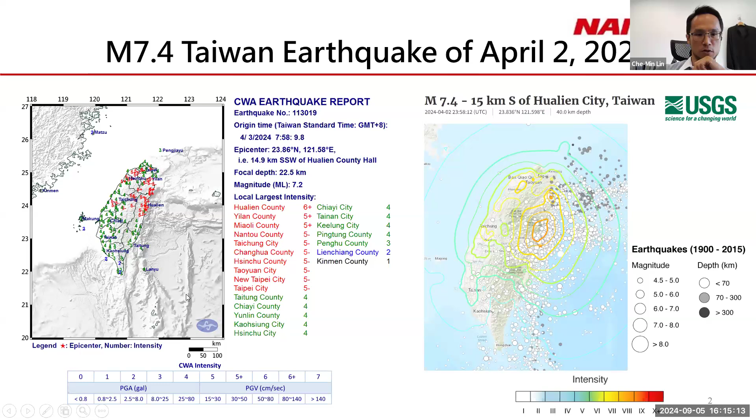Sorry, let me use this. Okay, it's better. At the northeast of the island, the Philippine Sea Plate is subducted to the north.

The longitudinal valley in eastern Taiwan is a suture zone, the boundary between the Eurasian plate and the Philippine Sea plate. Most of the Taiwan island at the west of the longitudinal valley is seen as the front of the Eurasia plate, and only the coastal range at the east of the longitudinal valley belongs to the Philippine Sea plate. Along the boundary between the longitudinal valley and the coastal range, there is a series of long faults called the longitudinal valley fault system.

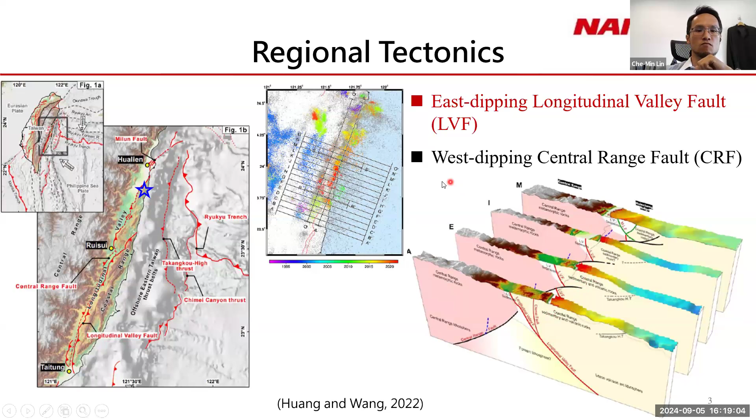Then an earthquake with a magnitude 7.3 happened in 1986. It caused not only damage in Hualien, but also building collapse in Taipei in northern Taiwan. After 2000, there were also several earthquakes that caused some damage in eastern Taiwan, mostly with magnitudes less than 7.

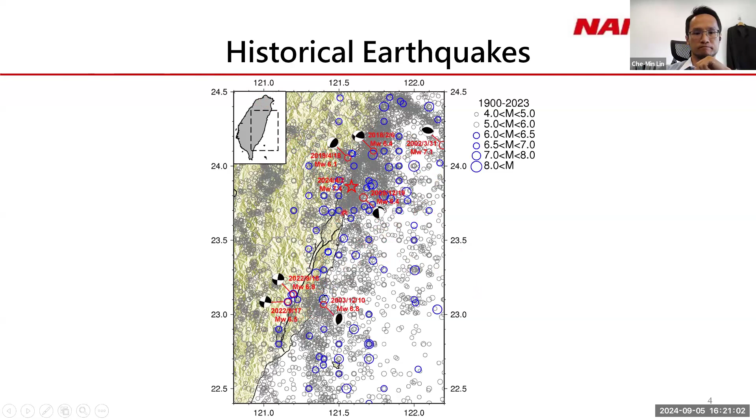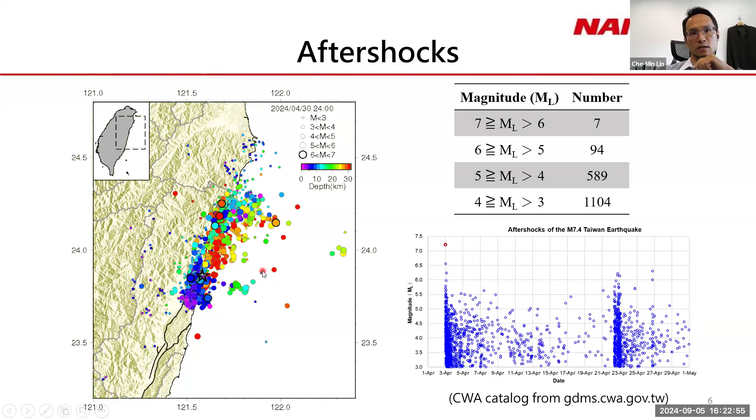Here you can see 3 large ones; they concentrate at the source of the main shock and were shallower than 10 kilometers deep. Furthermore, a minor third wave with 2 large earthquakes started on April 26th. Aftershocks have continued to occur until now, and actually this Monday, a magnitude 5.5 earthquake occurred around this region.

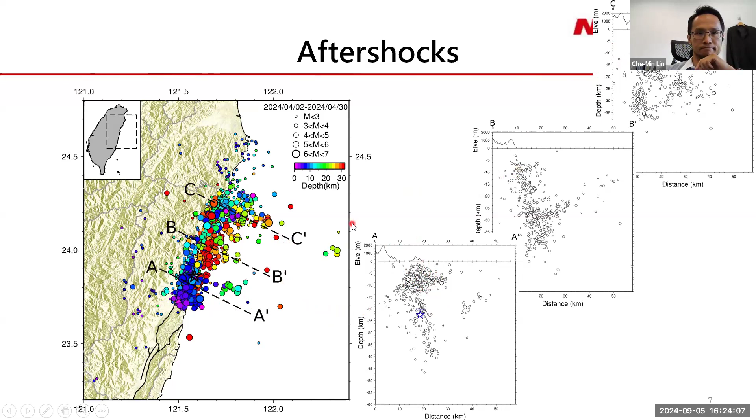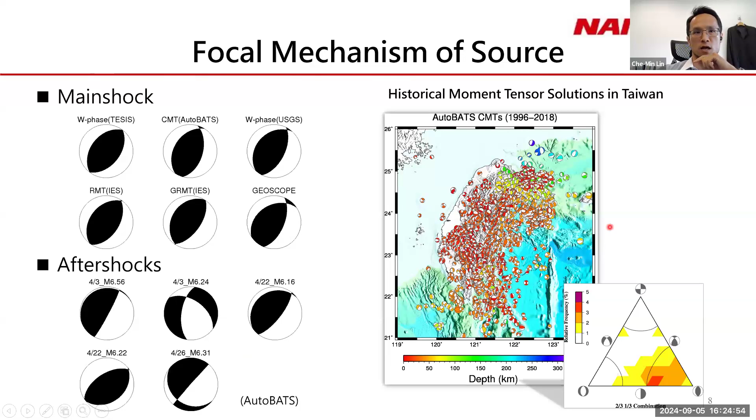The maximum slip of the fault plane happened near the hypocenter of the main shock, and the large slip moved to the shallow part in the north. Most of the seismic energy was released within 20 seconds, but the rupture duration was over 40 seconds.

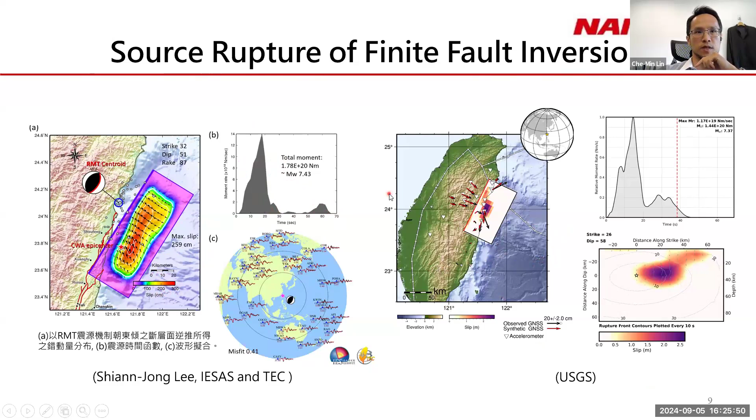The thrust fault rupture of this large earthquake along the northern longitudinal valley fault is also presented in the co-seismic displacements measured by GNSS stations around Taiwan. The stations on the hanging wall east of the longitudinal valley fault had the largest uplift of about 40 centimeters. Horizontally, the stations on the footwall west of the longitudinal valley fault moved to the southeast with the largest displacement of over 20 centimeters, pushing the eastern side displaced to the north and south.

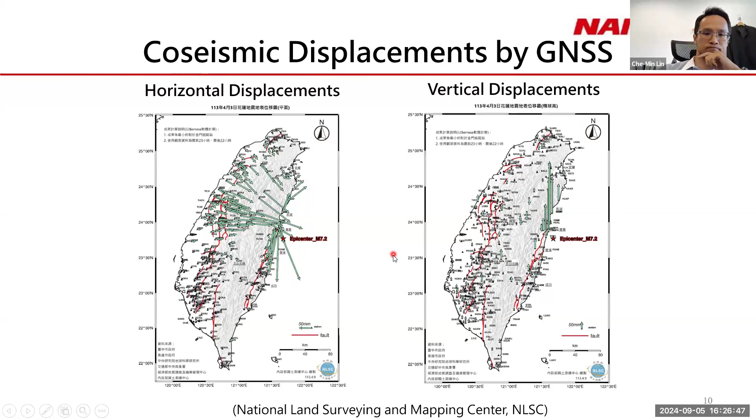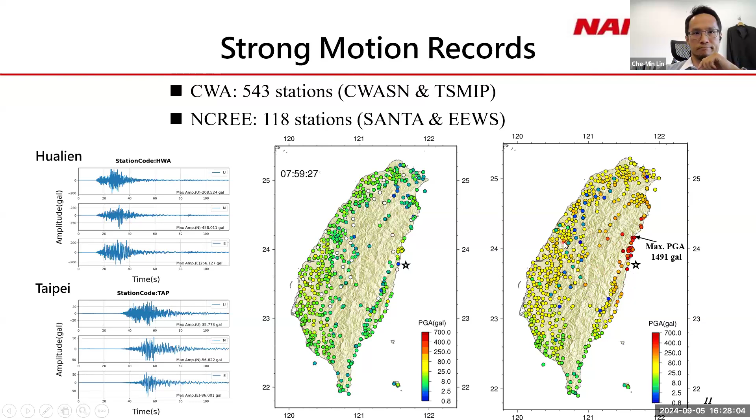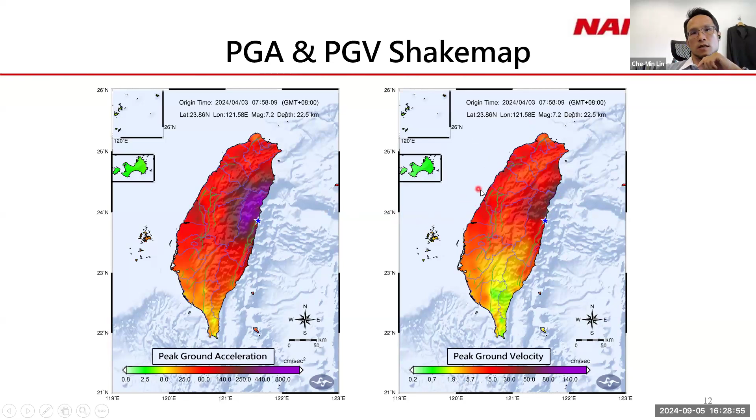The shake map of the peak ground acceleration shows that there were large areas that experienced ground motion of over 400 gal in eastern Taiwan, and about half of the island was shaken by ground motion of over 80 gal. For ground velocity, the maximum value observed near the epicenter was over 80 centimeters per second. The high peak ground velocity region extended from the epicenter to the north, and the peak ground velocity of the island's northern half is higher than that of the southern half.

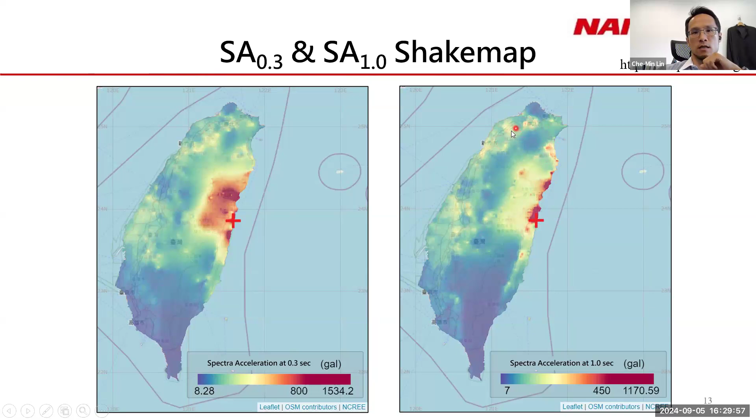Here we also show the shake maps of the spectral acceleration at 0.3 and 1 second. The distribution of the short period and long period spectral acceleration is similar to the PGA and PGV maps. The area with high short period spectral acceleration is large around the epicenter, but the area with high long period spectral acceleration is narrow and extends to the north along the coastal line. Besides, some local places show relatively high ground motion, especially in northern Taiwan, like the Yilan Plain, Taipei Basin, Taoyuan, Hsinchu, and Taichung area.

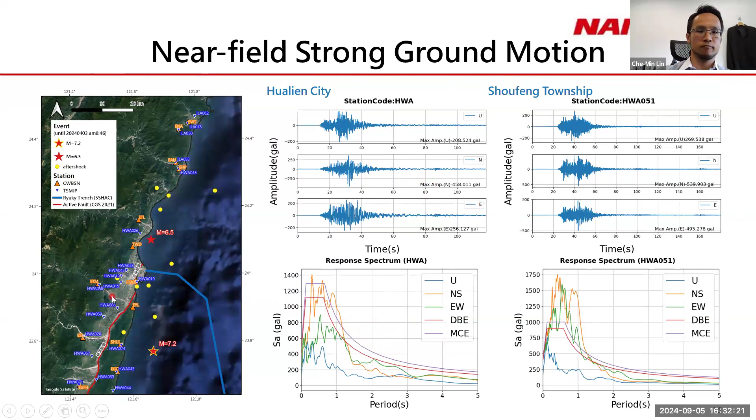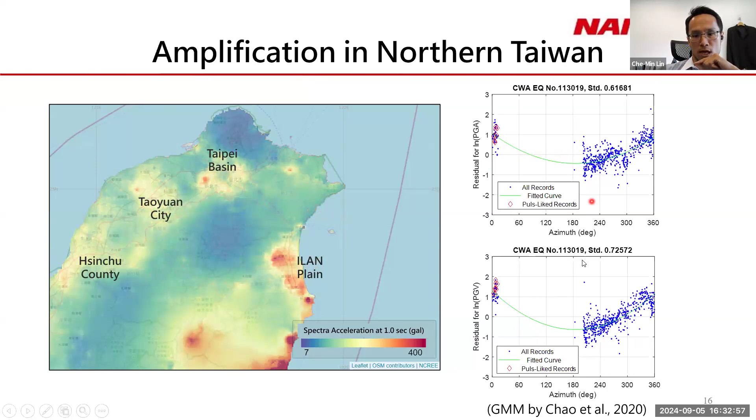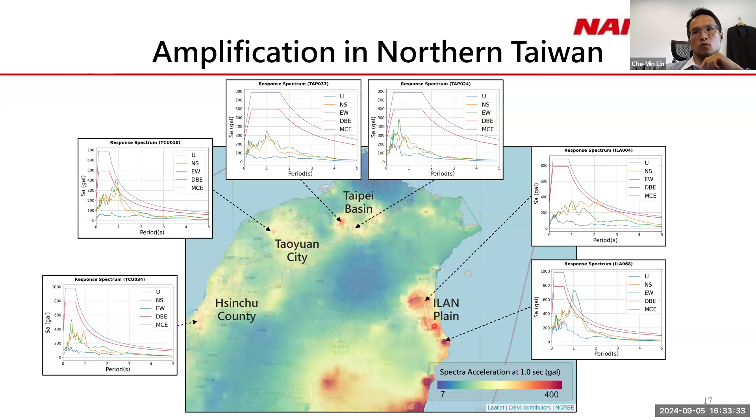Some of the response spectra are close to the design code, and some buildings in these regions were partially damaged during the Hualien earthquake. There are some reasons that caused the seismic amplifications in these regions. The first one is, of course, the site effect. The site amplifications in the Taipei Basin and Yilan Plain are significant and well known from historical earthquakes.

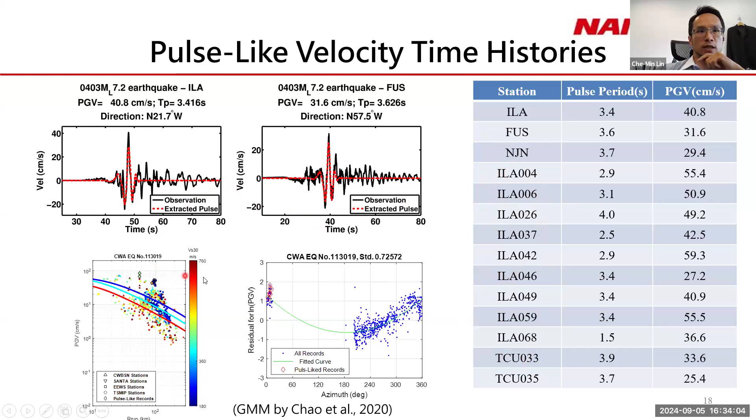The second reason is the long period velocity pulses. About a dozen stations observed pulse-like velocity waveforms during the Hualien earthquake. Most of them are located at the Yilan Plain. The velocity pulses result in the high peak ground velocity and long period spectral acceleration in Yilan Plain.

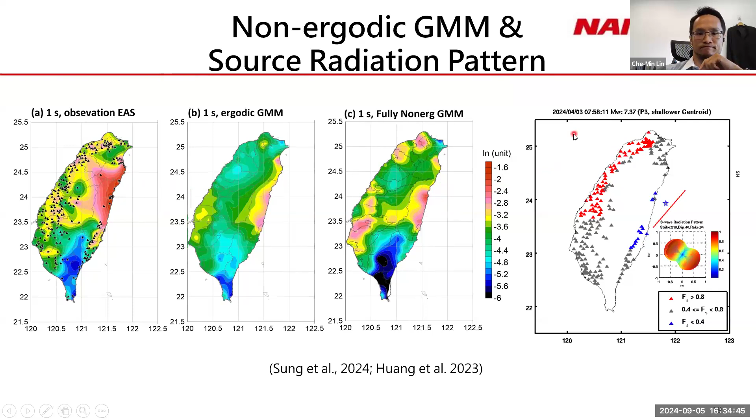So this is my summary. The magnitude 7.4 Taiwan earthquake on April 3rd ruptured a high angle and east dipping fault plane with over 70 kilometers in length, from a depth of 10 kilometers to 30 kilometers. It may correspond to the northern part of the deep longitudinal valley fault system, which is the boundary between the Philippine Sea Plate and the Eurasia Plate.

The high intensity and long duration ground motion of the main shock caused many building damages and a lot of large-scale landslides in eastern Taiwan. The site effect, velocity pulse, source rupture directivity, and radiation pattern resulted in local ground motion amplification in specific areas in northern Taiwan. Okay, thank you, this is my presentation.

Okay, thank you, Dr. Lin. I compliment you, your slides were excellent. Your graphics were excellent, and you presented a lot of information.

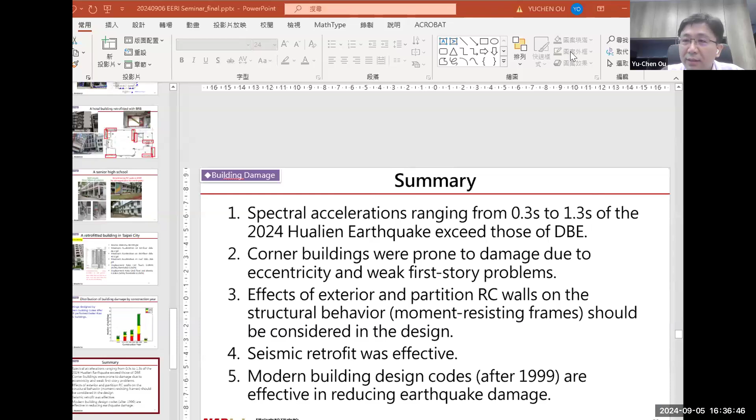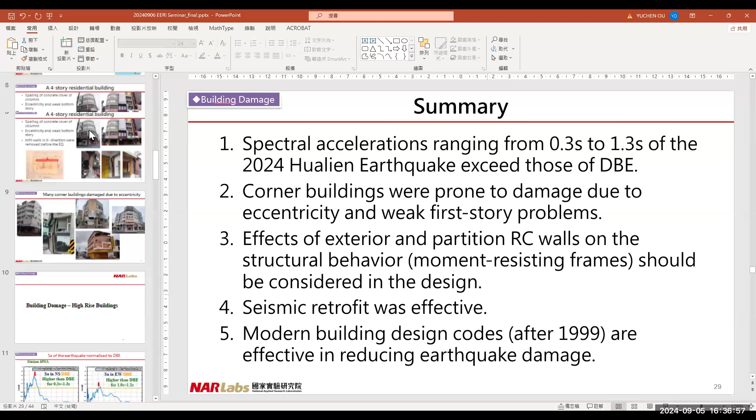Thank you, Bruce. I think I already shared my screen. Let me see, go to slide mode. Okay, that's the summary. Can you see my slides? Looks good, thank you. Yes, thank you.

It's my pleasure to present the damage to buildings and other infrastructures to you today. I'm the director of NCREE, and I already put my email address on the slide, so if you have any questions you can use this email to ask me after this presentation.

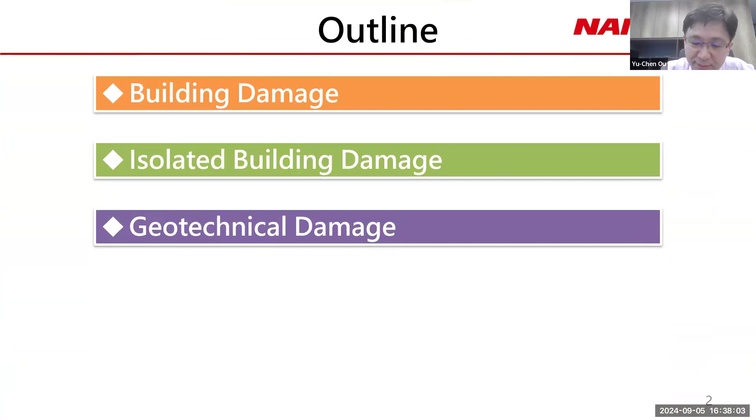So this is my content. I will talk about building damage, and also spend some time on the performance of isolated buildings. I will talk about geotechnical damage, although this is not very significant, and there was no damage to bridges, so I will not talk about bridges. First, it's about building damage, and I divide the content into two parts: the first will be talking about low-rise buildings, and the second part will be talking about mid to high-rise buildings.

Hold on a second, let me try to close this. Okay, so before we talk about the building damage, I want to show you the acceleration magnitude of the ground motion.

From the left-hand side, you can see the peak ground acceleration recorded in Hualien City is 458 Gal. Gal means centimeter per second squared, so 1G is about 1,000 Gal. On the right-hand side, you can see the response spectrum of the ground motions, including the north-south direction, east-west direction, and vertical ground motion.

Can you see my mouse pointer? Yes, we can see it. Okay, so you can see that the response along the north-south direction is quite significant. The spectrum acceleration at 0.3 second is about 1,400 Gal, which is even more than the MCE design spectrum value according to Taiwanese code. So the shaking was quite significant.

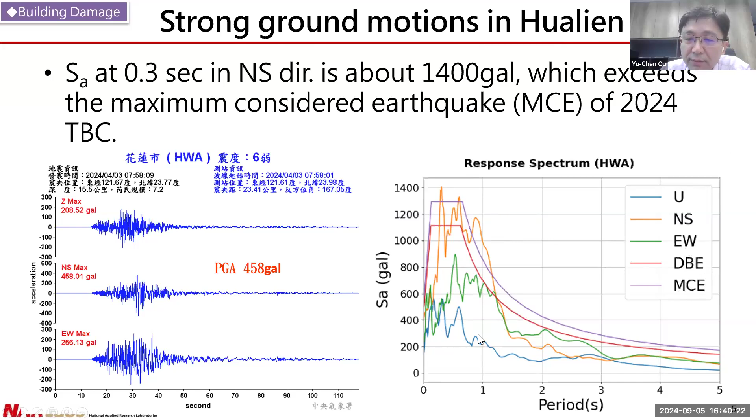In the east-west direction, the response of the acceleration is not as great as the north-south direction. And this is the vertical ground motion response spectrum.

So from this comparison, you can understand that the shaking was quite significant - more than the design spectrum value, more than the shaking expected in the design.

In the following slide, I will show you the damage to the buildings. From the photo, you can see this is a collapsed building - the first story was totally gone. This is a typical soft-story collapse.

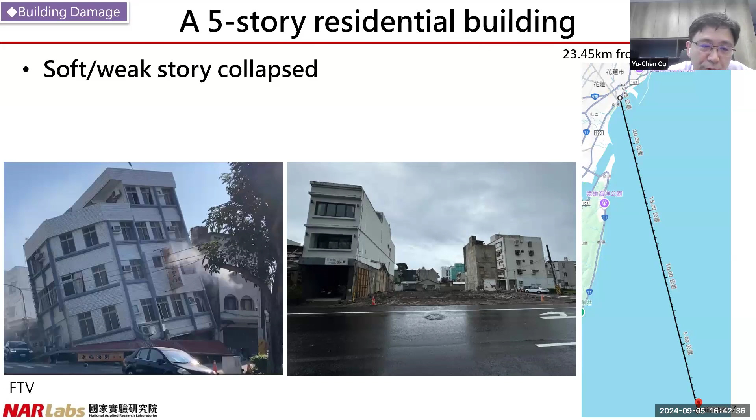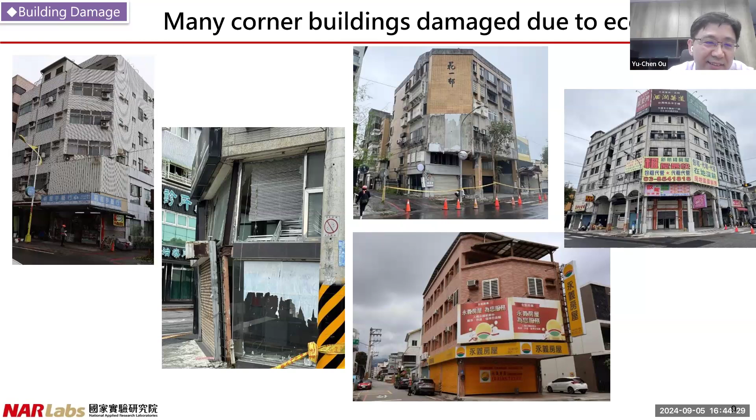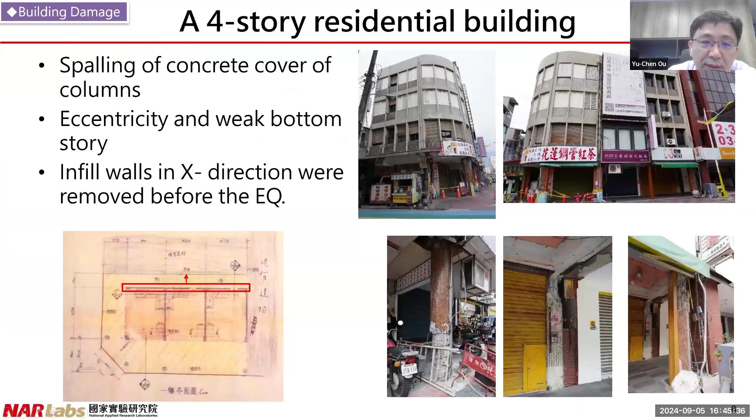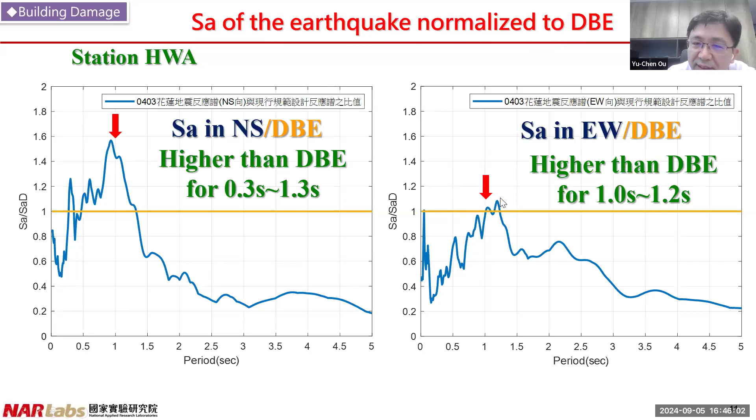Okay, so let's come back to the high-rise building. If we look at the 1 second spectrum response, it's significantly more than the design value in the north-south direction. Also in the east-west direction, the spectrum value of the ground motion is also a bit more than the design value. This poses a challenge to buildings designed even based on the design code. We expect that some damage is expected.

It is worth mentioning that this building suffered some damage during the 2018 Hualien earthquake. Already some damage had occurred to the building. Then the staff of NCREE went to the site, went to the building, and tried to persuade the building owner to do the seismic retrofit. But in the end, the building owner decided to do just the repair. They did not choose to do the seismic retrofit.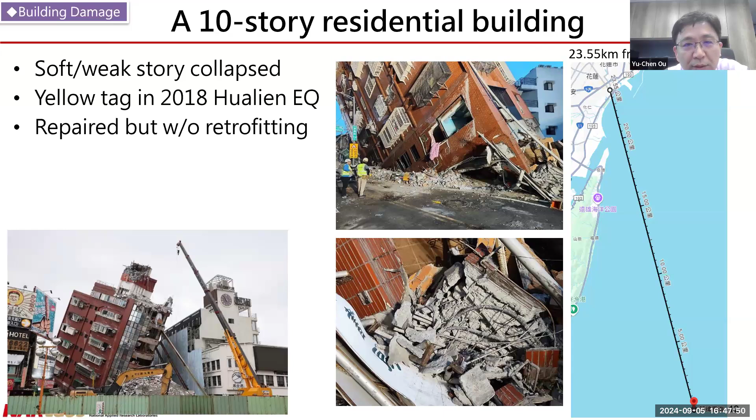So this time, this building did not go through the earthquake well. In the end, it collapsed. We believe that if they had chosen to do the seismic retrofitting, the result would be different. We have some other proof to show you the effectiveness of doing the seismic retrofit.

So this is another mid to high-rise building. It's 15 stories high, and you can see some damage to the exterior walls, and also some damage to the second floor girder, but this is just one girder. Most of the damage only occurs in the exterior wall.

It's worth mentioning that in Taiwanese practice, these exterior walls with openings are usually considered non-structural walls. They are not considered in the structural design or structural analysis. So we expect that these walls would suffer damage during the design earthquake, like this one. This is expected in our design. We mainly rely on the special moment frames in this building to resist the earthquake.

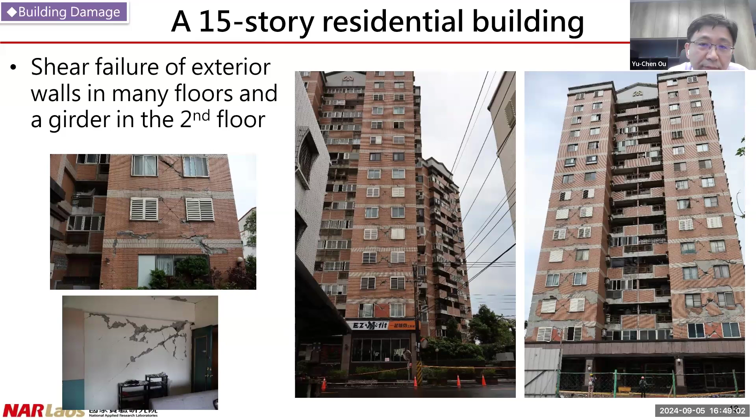This is another building, and you see that there is a setback in the third floor. You see that some damage occurred to the columns, and also some exterior wall damage to the fourth floor and higher.

I believe this building was designed based on an earlier code, so you can see that the reinforcement detailing was not so good, resulting in some shear damage to the column also.

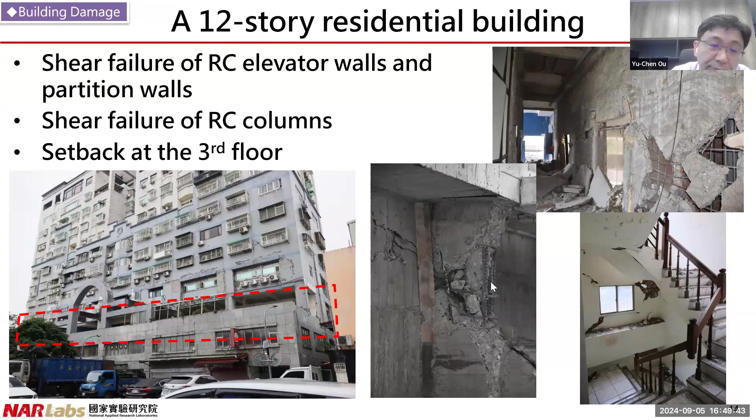And this is another building. You see quite a lot of damage to the exterior wall, but no damage to the moment-resisting frames. This is expected in the design.

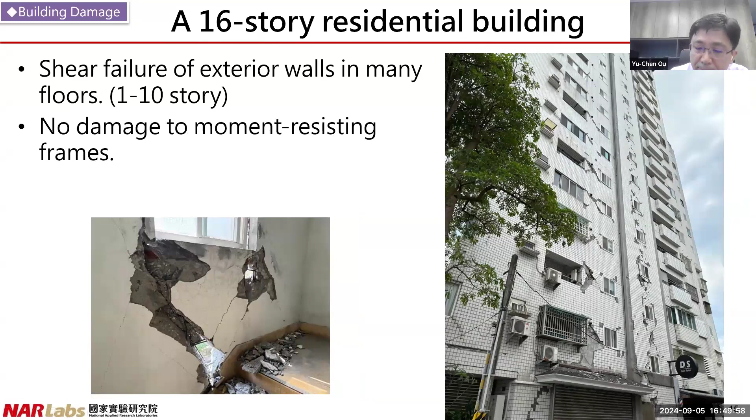This one, I think the first story is quite weak compared to the other stories. There's some weakened and soft first story problem to this building, so a lot of damage occurred in the first story. We also found that the construction quality was not so good.

You can see that some longitudinal bars were cut because they needed holes for the pipeline. This is not good construction quality. You see that this is one of the main bars cut due to the pipeline during construction in the first story.

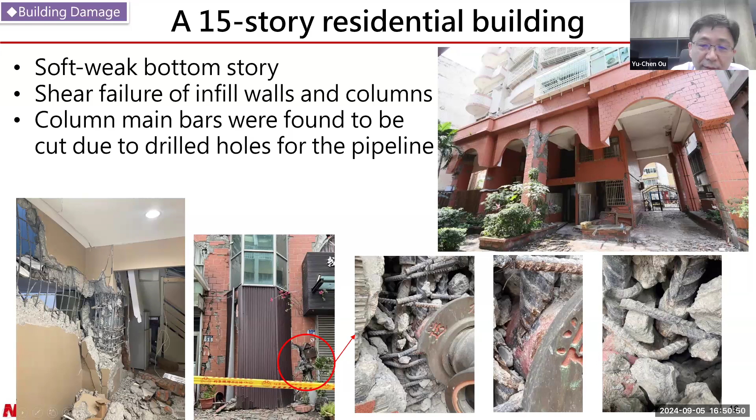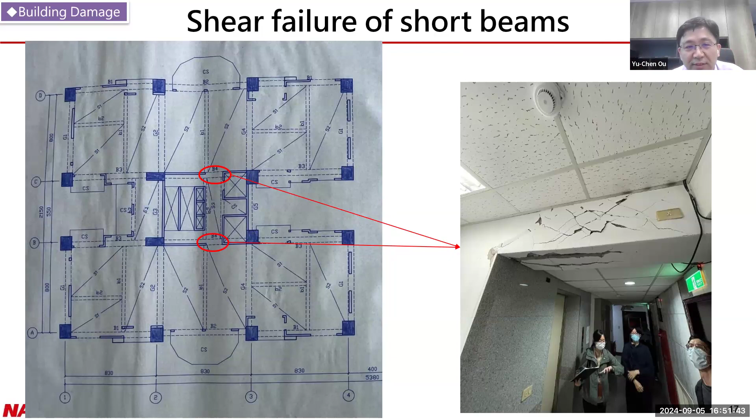This is a shear failure in two of these beams, due to the short beam effect. This is the beam between the two columns, and these beams are part of special moment frames. But because of the presence of the non-structural RC walls in Taiwan, which need no design consideration, and also some walls for what I believe are elevators, these walls make the beam much shorter than the original, so the shear demand increased, and that's why you see shear failure in these portions of the beams.

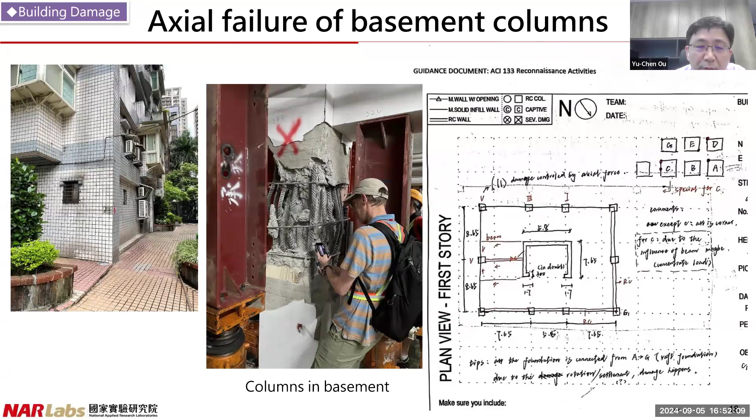We also found in the basement that some columns suffered severe axial damage. I believe the detailing was not so good for these columns, and significant cracking of the concrete can be observed. This one is the columns of the pedestrian arcade. From the damaged column, you can see the detailing was poor - there are lap splices of reinforcing bars in the plastic hinge regions. This is not good detailing, and that's why you see such severe damage to the column.

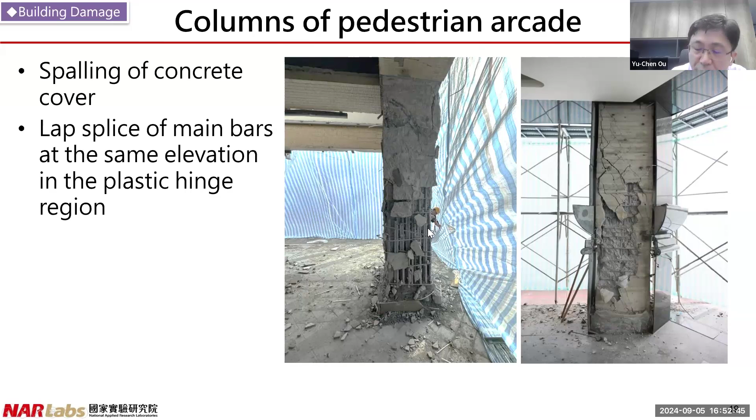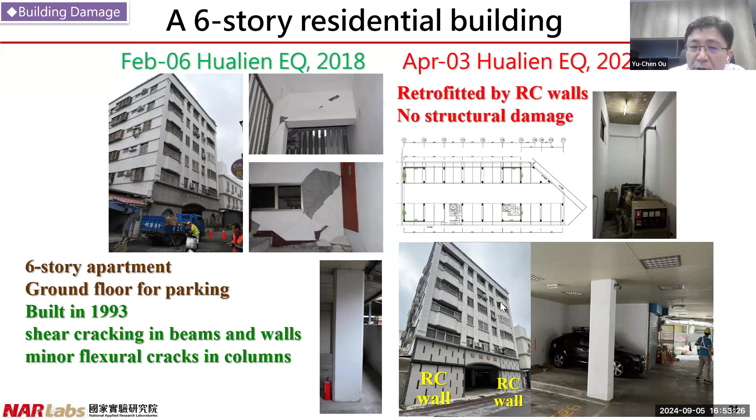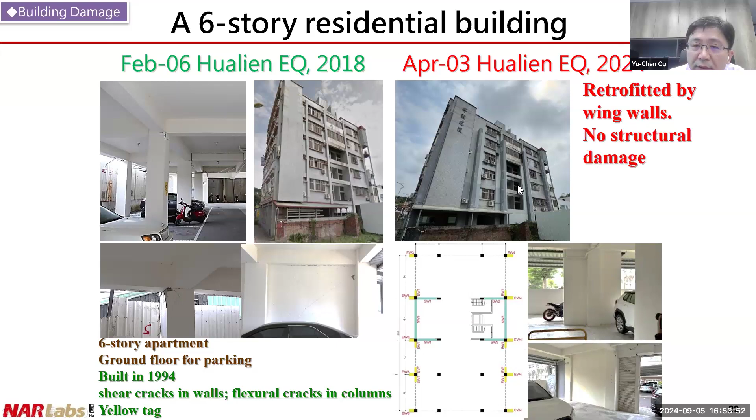This is another building that suffered damage during the 2018 Hualien earthquake, and after that, it was retrofitted with wing walls added to the column, and also some additional walls. This time no structural damage was observed. Another example here - after we added walls to retrofit, you can see the blue line marking the retrofitted walls, and no damage was observed during this earthquake.

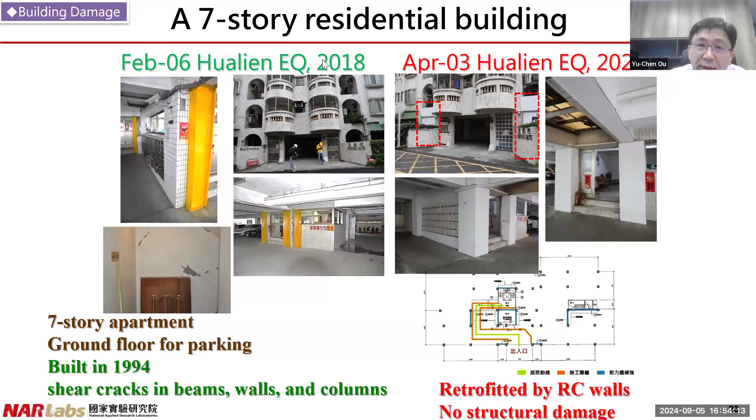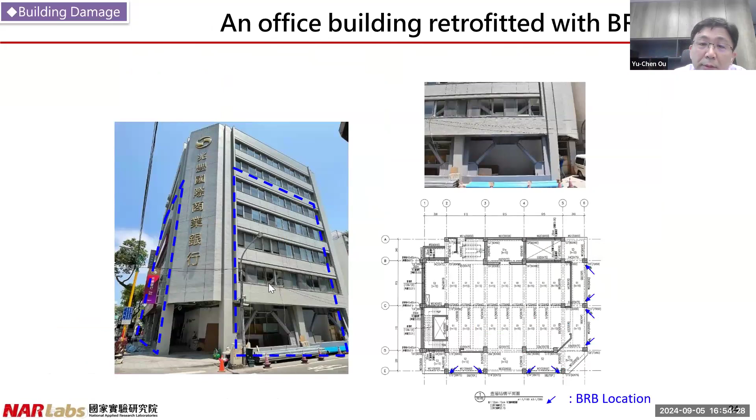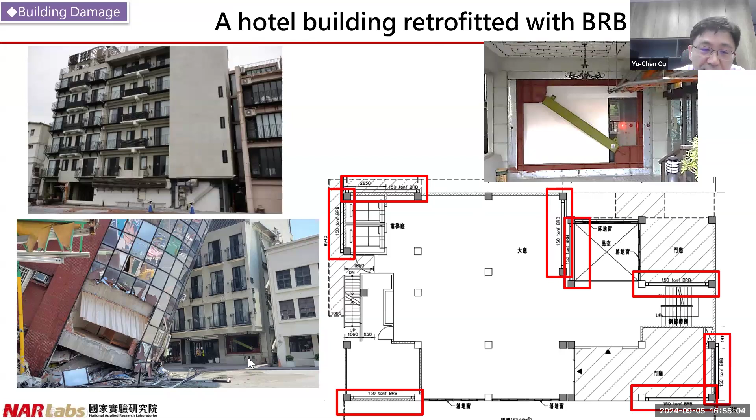This is another famous example. This building was also even older than the collapsed building I mentioned, where the owner chose to just repair it. This building's owner did a BRB seismic retrofit, and it suffered no damage to the building. This is right next to the collapsed building, showing the effectiveness of the seismic retrofit.

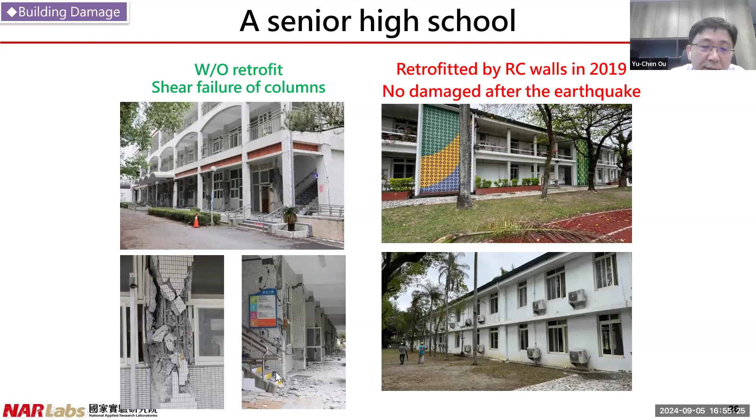After retrofitting this one, we installed a structural health monitoring system, and we found first of all no damage to the structural system. This is in the Taipei city area. We also measured the acceleration and the displacement response. The maximum ground acceleration was about 86 gal, and the relative displacement in the first story was about 0.3%. This is lower than the 0.5% expected in the design during this type of small ground quake, so the performance of the building is consistent with the design expectation.

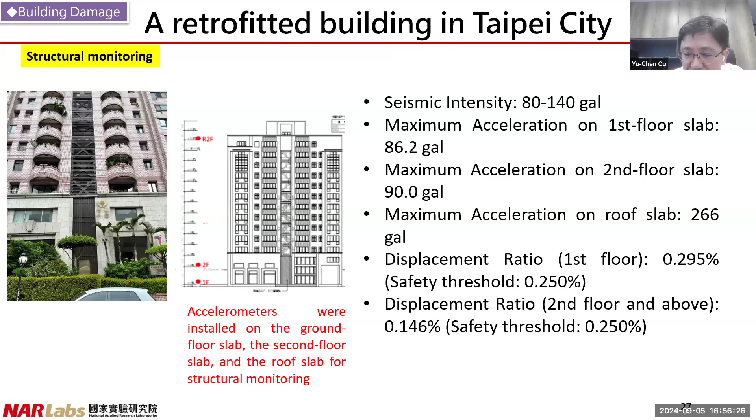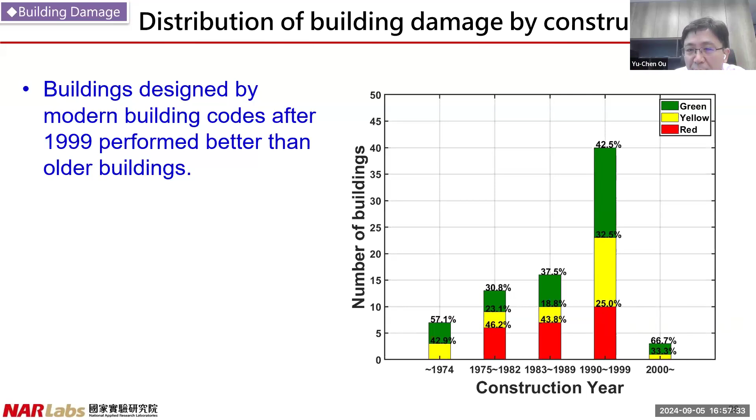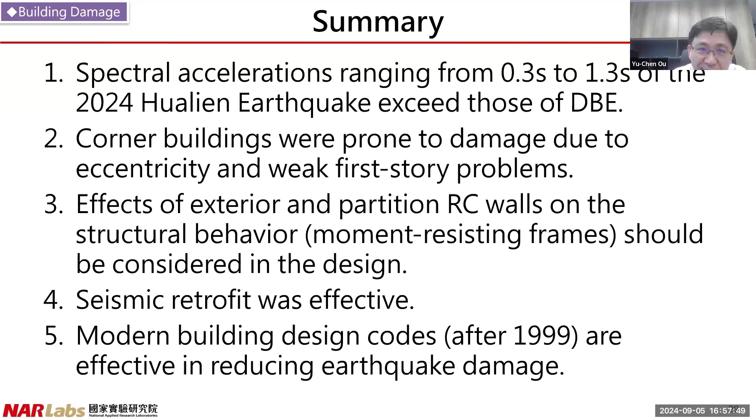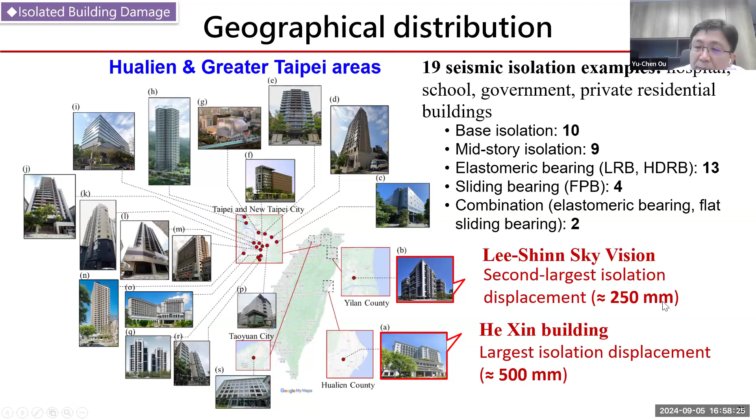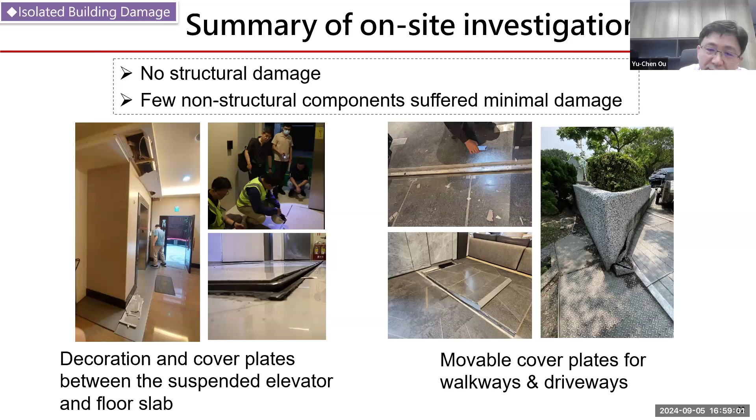Overall speaking, there was no damage to the structure of these isolated buildings. Some minor damage occurred to the cover plate that covers the gap between the elevator and the superstructure, just some minor damage to this cover plate because of the large displacement between the isolated structure and the ground.

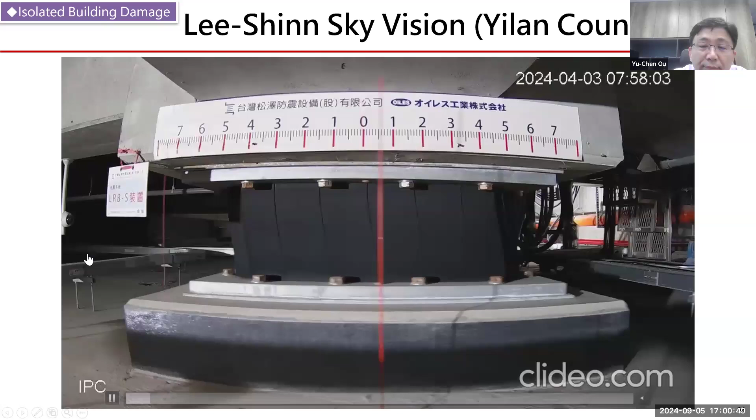And this one shows you the recorded video of the isolation during the earthquake. This is the first time that we have this type of recording, the actual movement of a lead rubber bearing during the earthquake. You can see that the relative displacement was quite significant.

So you might wonder about the still some displacement of the equipment. I will show you what happened if you don't have the isolation in the following slide.

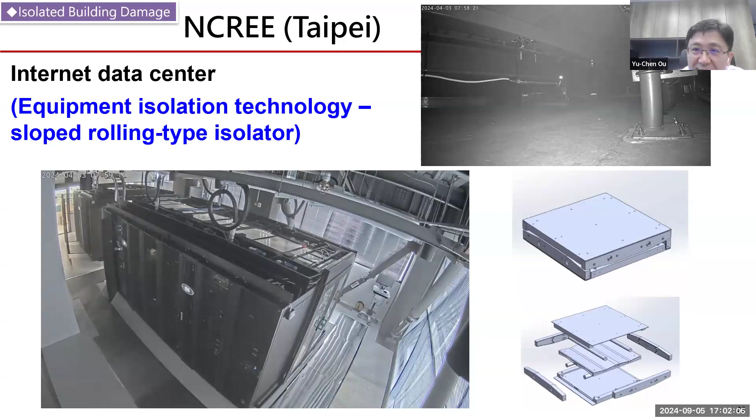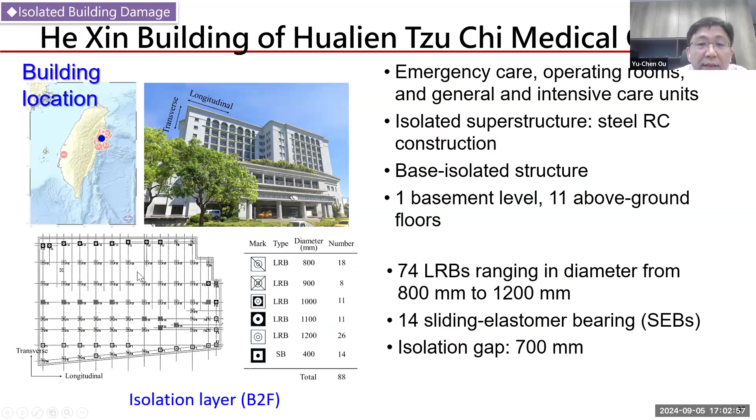If we take this hospital, for example, this is in Hualien city and it suffered a very large displacement in the isolation layer. They used 74 lead rubber bearings and also some sliding elastomer bearings in the base to protect the hospital. This is the most important hospital in Hualien city.

Excuse me, excuse me, this is Bruce Mason.

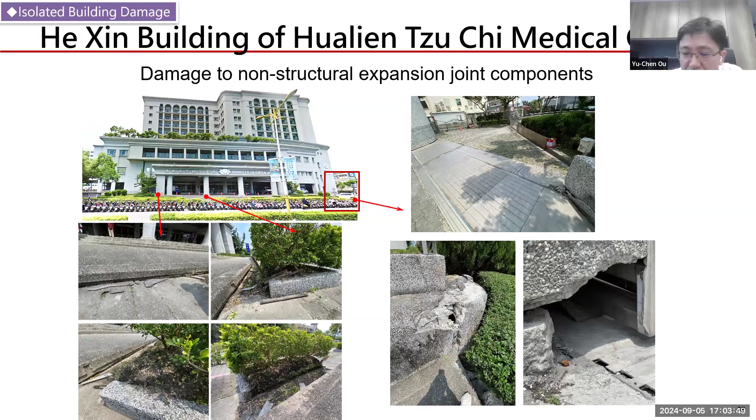The peak input acceleration for this building was about 200 Gal, and we have accelerometers installed in the building.

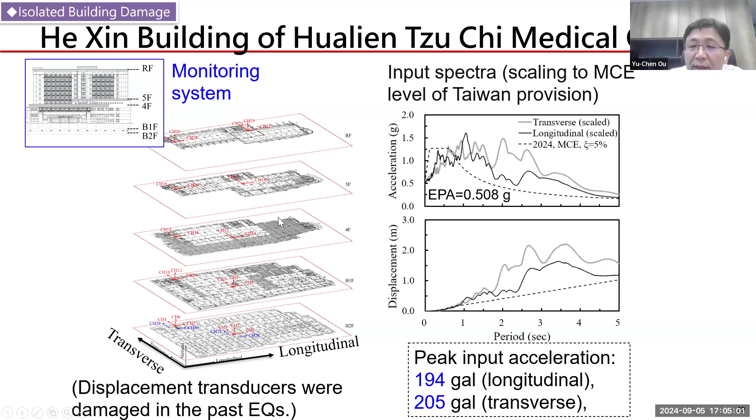So we know the response of the building. This is the acceleration response of the building, and this is the isolation layer. These accelerations represent the ground acceleration, and these are the acceleration response of the building.

First of all, you can see that the period of the building was indeed lengthened, and the effective period of the building was about 3 seconds. So the isolation was effective to lengthen the period. However, because of the very significant long period spectrum response of the ground motion, so still,

we found that the acceleration reduction efficiency was not so good. We still have a quite significant acceleration response in the buildings. And also we can see that the large displacement

occurred. This is predicted because the displacement transducer was damaged in the previous earthquake. So we can only use the acceleration measurement to predict the displacement response.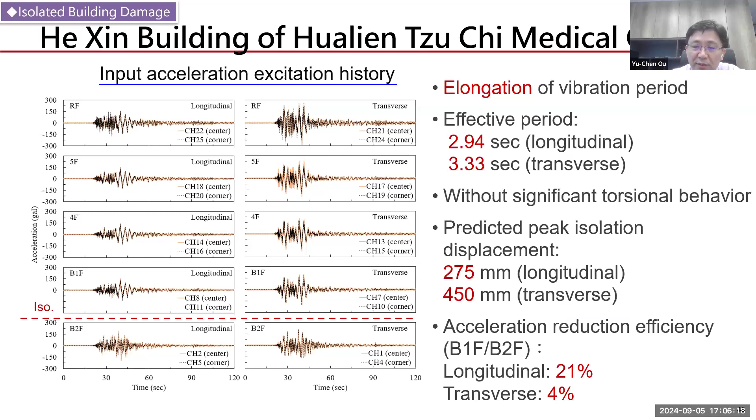So even though the structural damage was minimal to these isolated buildings, we found that the isolation efficiency was not so good as we expect, because of the large long period component of the near-fault ground motion. So this is something we need to pay attention to in the design of the isolated building.

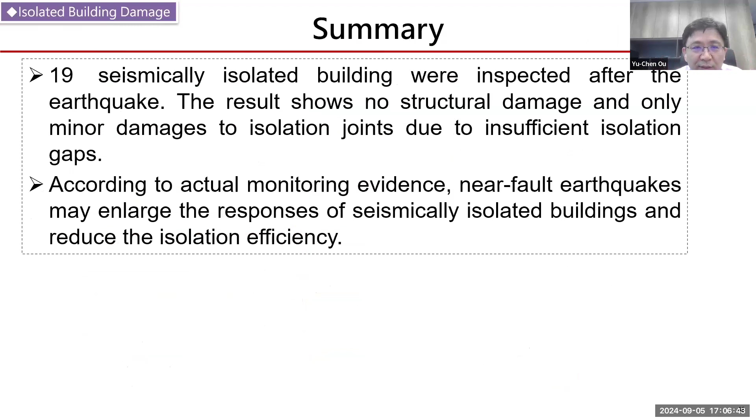Okay, so this one will be quick. This is about the geotechnical damage. Not so much was observed during this earthquake, only in the port area because of the reclaimed land backfilled by gravel and sand.

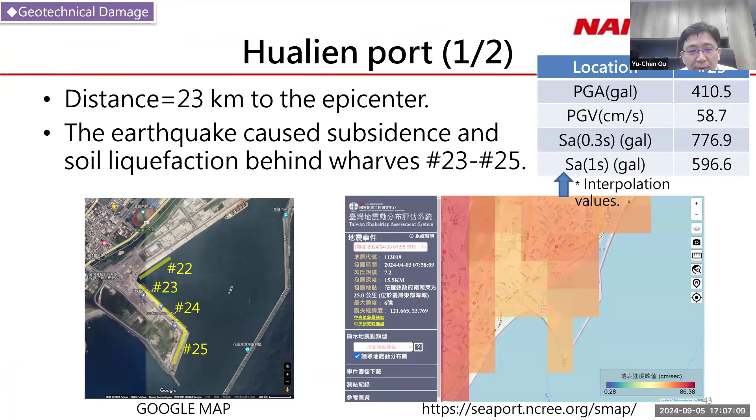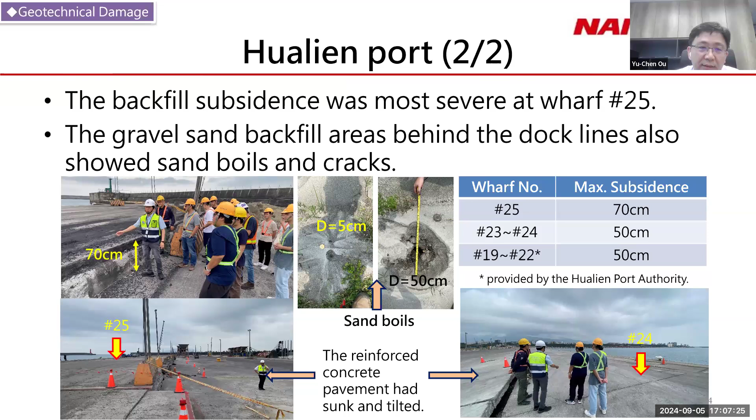So during the earthquake, there was soil liquefaction found. You can see there's some sand boils and cracks, and also some subsidence of the ground. Only occurred in the port area, not in the residential area or city area.

Okay, so this is my presentation. Thank you.